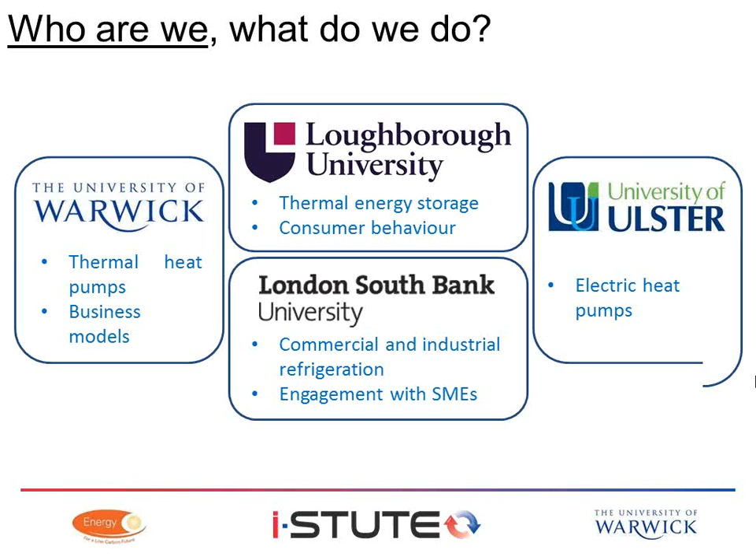In terms of people, just running through: there's me, there's David Elms sitting there from Warwick. David is from the Warwick Business School, because we have a strong business input. From Loughborough, there's Phil over there, and somewhere there's Vicky. Phil's main interest is in thermal storage, Vicky is in consumer behaviour.

Graham here and Judith at the back from London South Bank work on cooling technologies of all sorts. We mustn't neglect the cooling side - we're interested in heating and cooling. Neil Hewitt there, his main thing is electric heat pumps that work well and produce high temperatures. There's also a bit of storage work going on there in Ulster as well.

Okay, so that's who we are. There's a grand mission statement - we're going to save the world and stop climate change. Well, no, we're going to do our bit. We are trying to do our bit to reduce carbon emissions by improving heating and cooling technologies and their integration and real use.

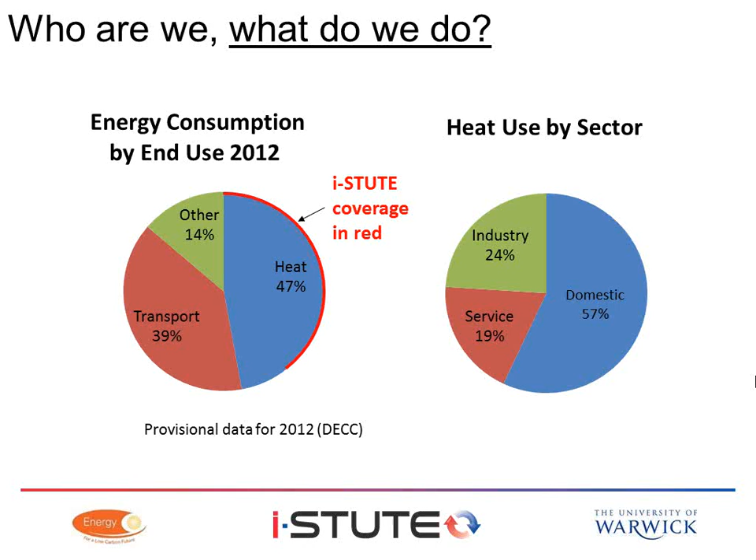I fished out a number that 16% of electricity use in the UK is devoted to cooling. That's a big chunk, but it's a bit difficult to put up on there.

Why the little I, apart from the fact that it looks cool to be an I-something these days? The I stands for interdisciplinary, and the reason that we're interdisciplinary is that us engineers like to get together and form nice little boxes that might be technically the bee's knees, but are too expensive and nobody wants. So the idea is that we involve people like David on the business models to see what will actually sell, and also from the consumer behaviour point of view, that we're trying to produce something that people will actually want. At the end of the day, if what we do does not produce something that people want and other people can make money out of selling, it isn't going to happen.

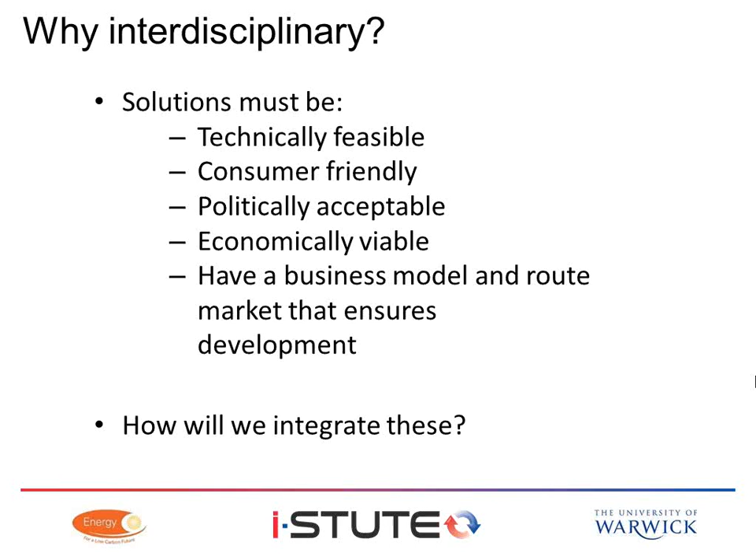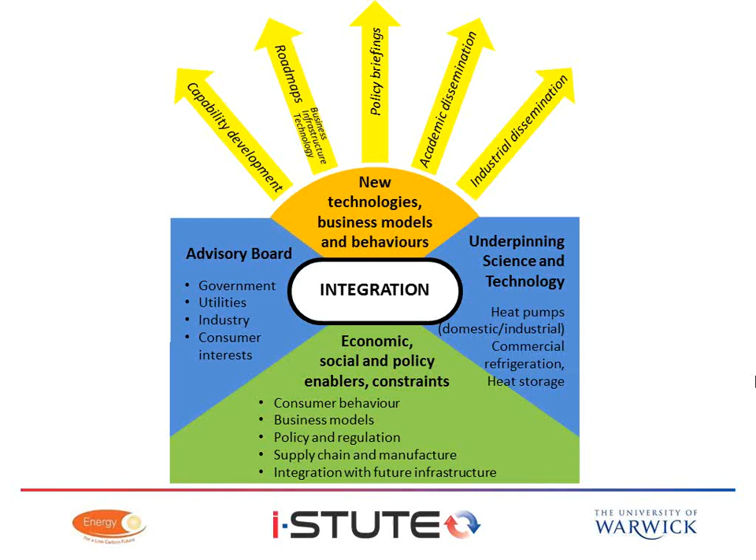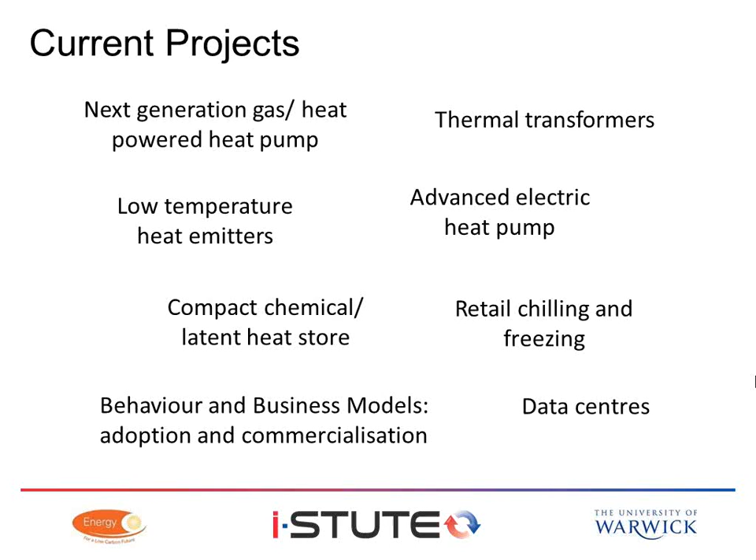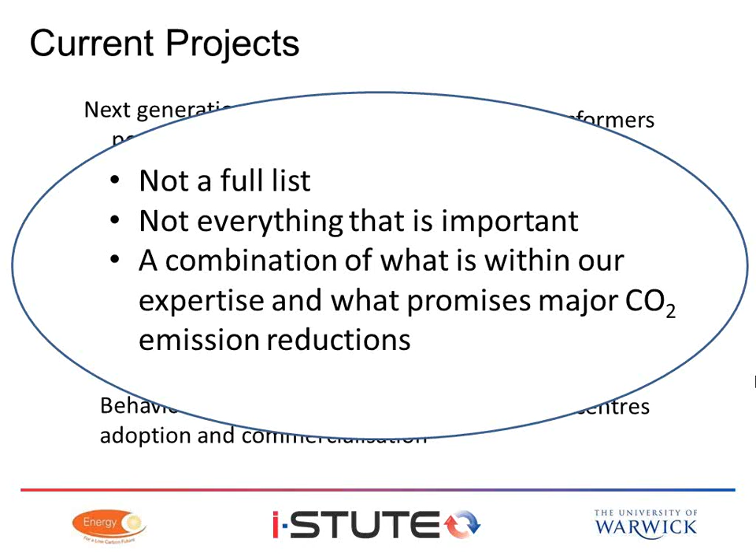So for the remainder of 5 to 10 minutes, I just want to run through the projects that we're working on, in no particular order. In fact, that's not even all of them - it's not a full list, it's not even everything that's important, but keeping a perspective, we've got funding for these 4 universities for 5 years. That's not going to change the world. So what we've done is pick on the things that have got high CO2 reduction potential and that we think we can do something about, we've got the expertise, and pick on those to have as big an impact as we can. That's what it's all about.

So now I'll run through, as I say, no particular order. One of the projects, the one that I'm interested in most, is gas-powered heat pumps. So, in a nutshell, throw away your condensing boiler, put a different box in, have a reduction of at least 30% in your fuel bills.

Reasons for that, apart from the CO2 reduction, we've already had Lindsay and others talking about the demands on the grid. So that's another reason for saying in a future heating scenario, there's still going to be some gas around, let's use it as efficiently as we can.

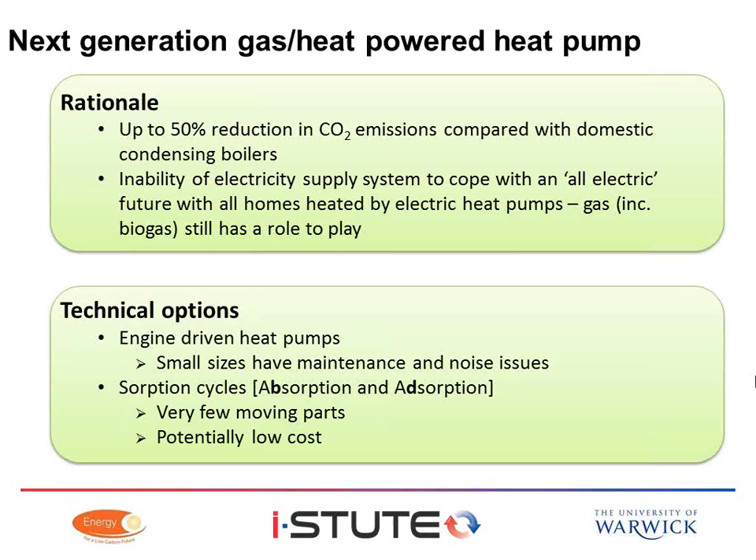And what we did in a previous project was to build a box that's still about that big and that high, and it didn't work quite as well as it should have done, but it did work. And that was the technical concept: big box outside the house, burns gas, gives you hot water.

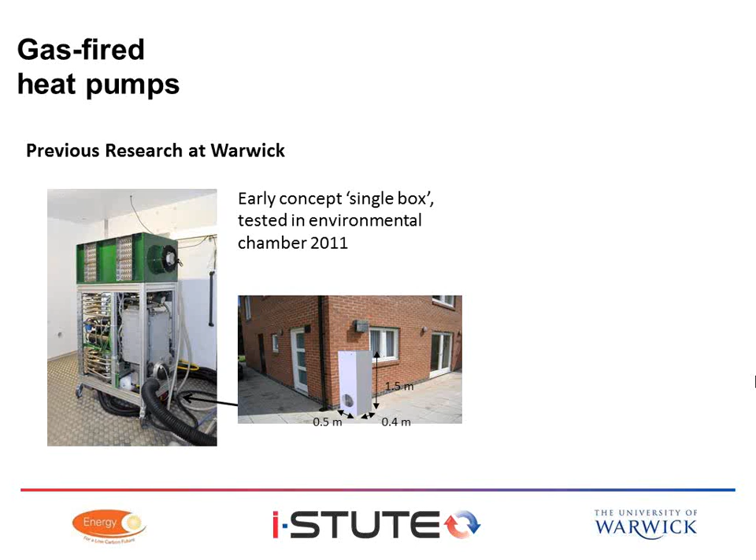As a result of listening to people like Andrew's predecessor at Baxi, also talking to Vicky, who did some consumer research, what we really need to be doing is effectively a split system where you've got a much smaller box outside because people don't want a damn great box in the backyard on the whole, and something inside that looks like a gas boiler, feels like a gas boiler, behaves like a gas boiler, but costs you less.

People don't want change, they want it to be just the same but cost them less. And yeah, ideally it should pay back for itself in about 3 years. So yeah, piece of cake. No, not really.

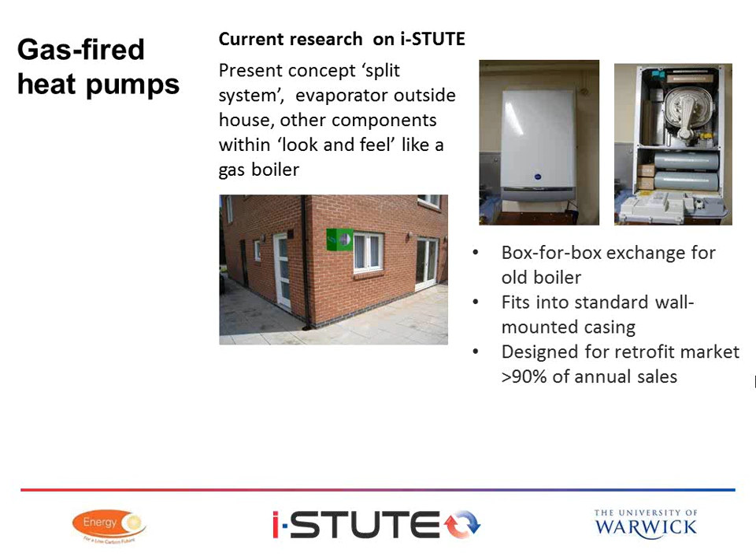Another project, this is going on at Loughborough. And again, this is related to what Lindsay and others talked about previously. We'd like to have lots of electric heat pumps out there, reduce CO2 emissions, but if we look at - I think this is one I stole from, yes, Steve Marland.

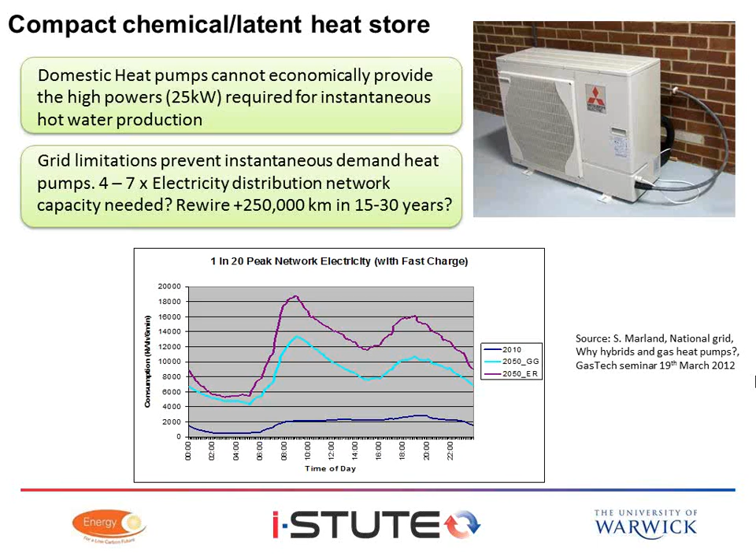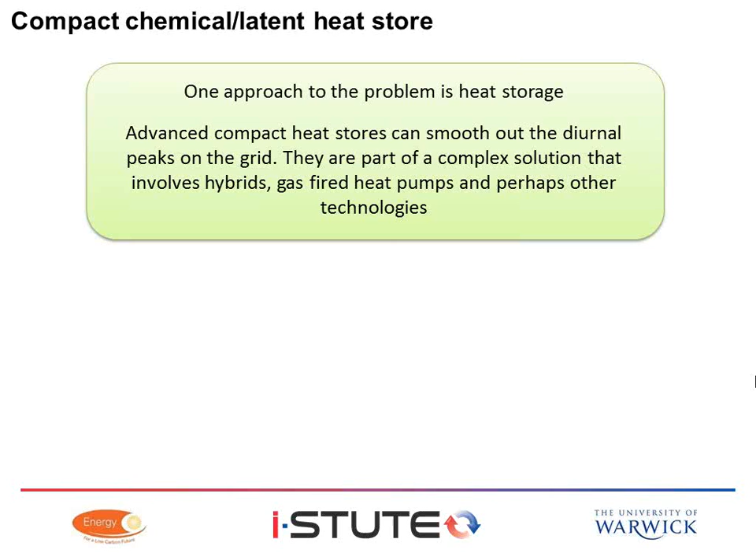It's a big issue. Part of the solution might be to actually store heat. So you can take some of the big peaks and troughs out of there by having a little heat pump running all the time, charging up a heat store, and then discharging it into your house to reduce just a bit of buffering in the load, really. So that's part of the solution.

And at Loughborough they've got both a short-term project and a short-term store - a few hours worth of heat storage to buffer your output between your heat pump and your house, based on phase change materials, comparatively straightforward technology.

And then there's another project for the longer term, and also possibly for more hours of storage, where you can use chemical reactions to store heat and have still a very compact store - 5 times the storage capacity of the equivalent hot water tank. Okay, so that's another area.

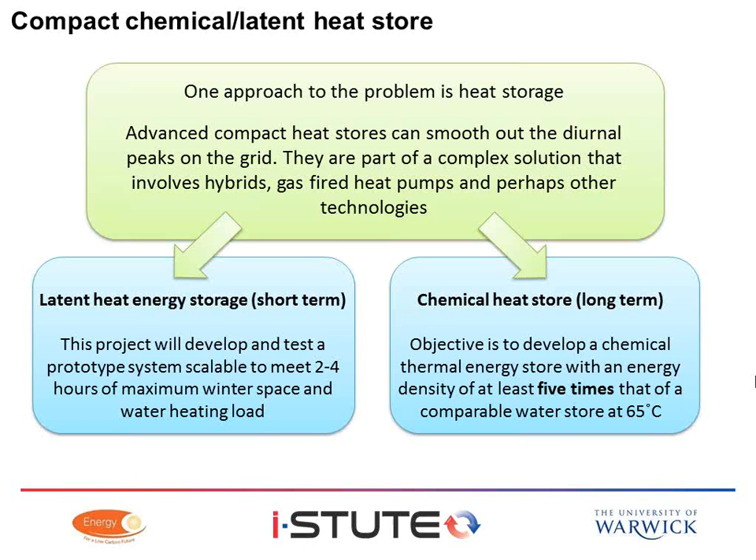Not forgetting electric heat pumps. It's a well-known and sad fact that in trials, most electric heat pumps do not perform as well as they do in the laboratory. There are issues to do with control systems, bad specification, bad installation, a whole range of things. What we have to do is to have real-life performance, have COPs - that's to say heat output over electricity input - of 3, whilst providing water that's hot enough for you. So there's a number of challenges there.

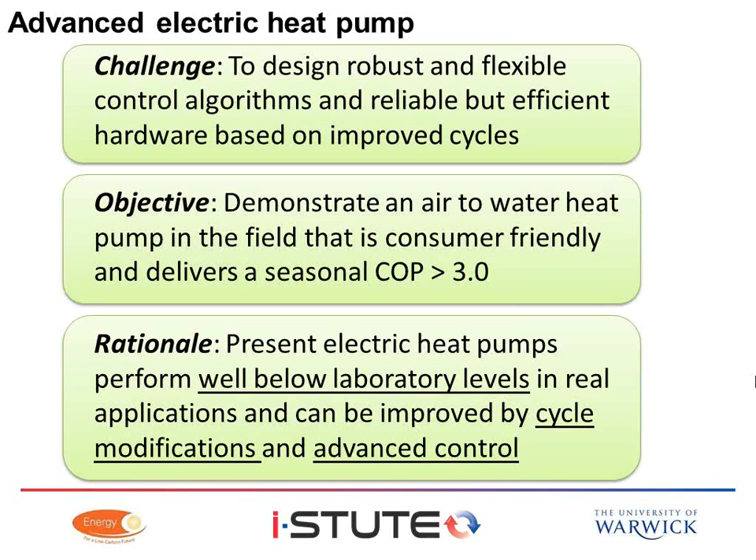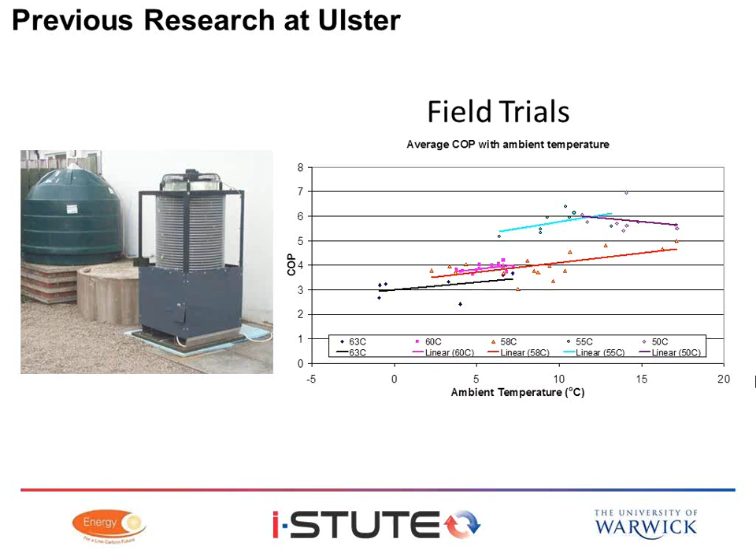In previous work, Neil over there in Ulster has produced these lovely Dalek-looking machines that in field trials do the required COP. But with all the constraints on the amount of space available, on the load on the grid, we need to get a bit cleverer than just having that bit of kit. We need to have a package that integrates stores, heat pumps, control systems in some seamless way that the consumer doesn't know about it. That's the key thing, that it should just be warm when you walk in and it shouldn't cost you too much to buy. So the work that's going on now is really on this integrated package, storage-led heat pump development.

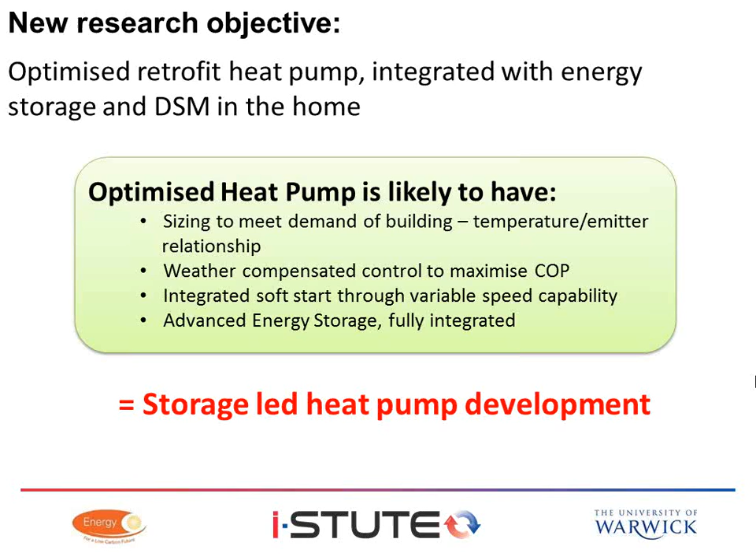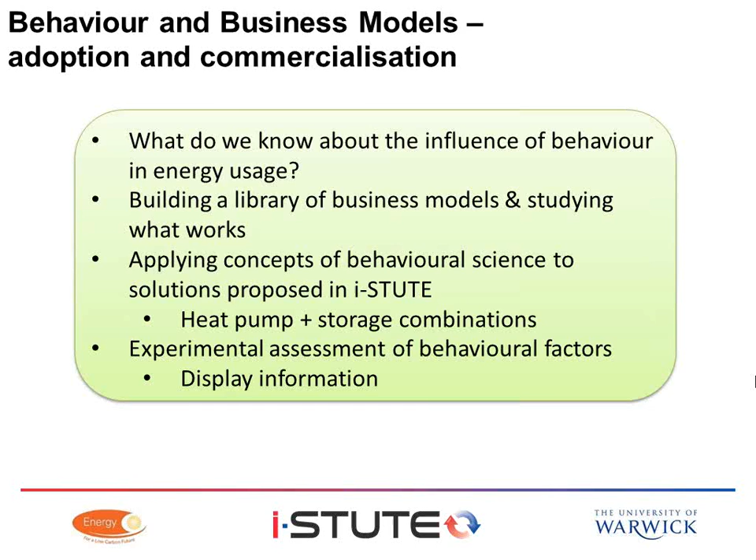Already mentioned quite a bit consumer behaviour, new business models - we've had some examples of that. So case studies, for example, for looking at new ways of supplying comfort to people, whether it's heating or cooling. Going to look at the heat pump and store combinations, look at all these smart systems for control and display information and so on. And as has been said before, there's various things appearing on the market there, so getting involved in that.

Also related to heating systems, this sounds a bit boring - low temperature heat emitters, radiators. All of these heat pump systems, whether they're gas or electric, work a lot better when they're producing water that isn't so hot. And so if we put on our techie hats, we say everybody should have a little fan boost into their radiators - it's a fan convector. And that would be the straightforward technical solution. You can buy some extremely expensive ones.

But there are consumer issues there. There can be noise, there can be drafts, they cost more, and you need a couple of wires going to every radiator. So we started to do some work with Vicky at Loughborough on looking at the consumer's reaction to these things, deciding what will actually work, and maybe we have to compromise.

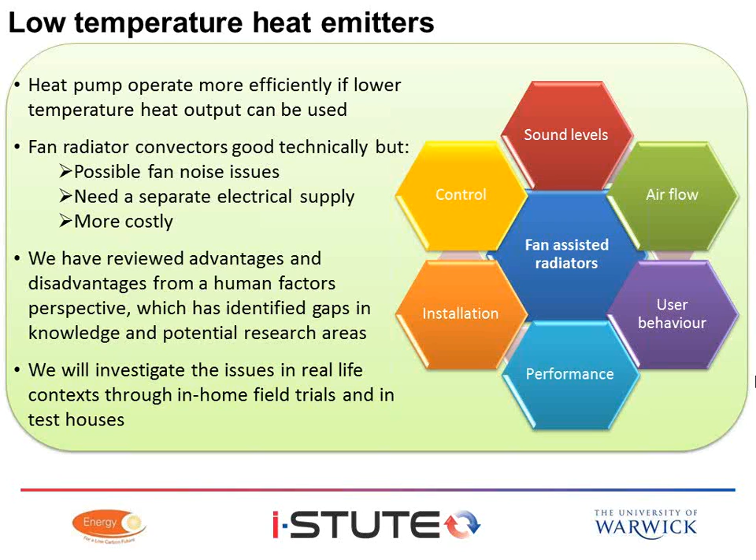You know, people don't want them. We've got to come up with something that maybe doesn't have quite as good performance, but at least people will use it. And on to cooling, which hasn't had much of a mention so far, but is an important chunk of what we do.

There is a considerable amount of energy used. You can see there's the equivalent of more than 7 million tonnes of CO2 per year in supermarkets. And a big chunk of that is all those display cases with your chilled food or your frozen food. You can do an awful lot with existing technology to reduce that. There's potential for saving there of nearly 5 million tonnes of CO2 per year. So, in one project...

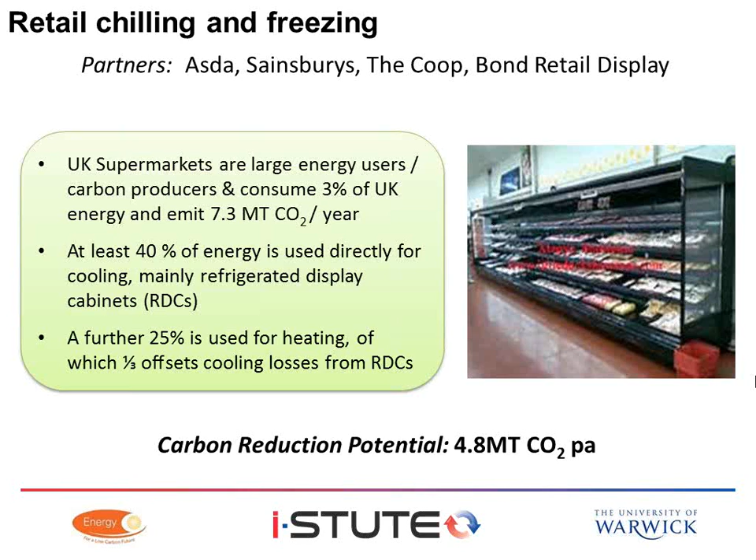Essentially, Graham's working to produce a new, improved cabinet that will have the same customer experience, we hope, but much reduced energy use. And there is a further project, a sort of next-generation new technologies, which will go even further. That's working with i-STUTE, with other manufacturers of cabinets and food outlets.

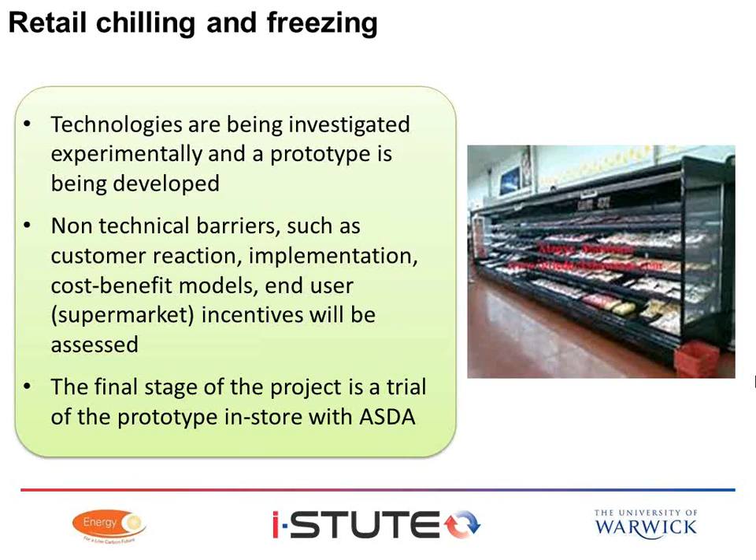Data centers are worth a mention, increasing numbers of them, and at the moment hopefully the data center is working and recording what I'm saying, and it's going onto the laptop over there, and you can all access this from the web later.

Increasing amounts of electricity are used all over the world in data centers, and the technology and approach to the cooling of them is a bit brute force and ignorance. It's not looked at in a holistic way. There's a lot of scope for reducing the energy from data centers, and again, we have a project on that.

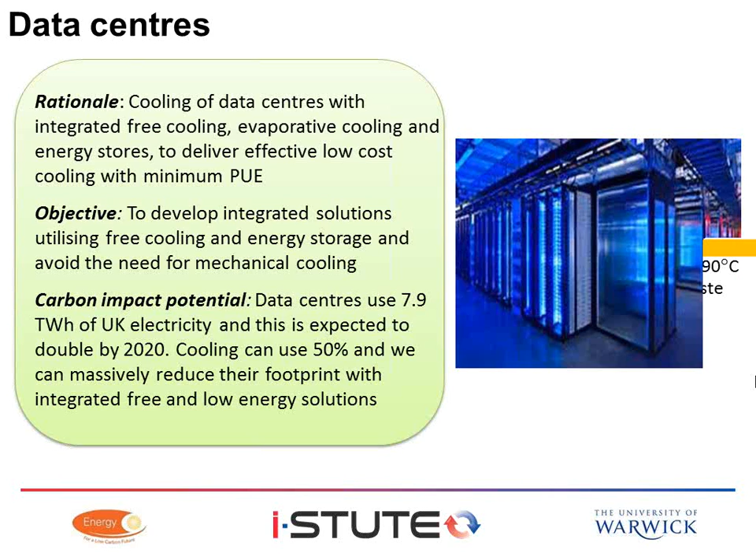Last project to mention, which is a bit of a blue-skies academic one. Well, I say blue skies, there's a definite need for it - it's an industrial application. Thermal transformers are magic thermodynamic boxes that take in a stream of waste heat and convert a little bit of it to something at a higher temperature level, and reject the rest to ambient.

Where they could really have a big impact within industry is the general process industry that uses steam heating. We're working with a very large manufacturer of heating systems in this area, and they see a big market for being able to take waste streams of condensate, hot water at 90 degrees C, that quite often cannot be used in industry, that come out of the steam system, and upgrade maybe 30% of that back up to 120 degrees to use for fresh steam.

We also have the possibility, without going into the details, of incorporating storage in there. So when you've got waste heat, particularly in the food industry where you get batch processes, you might have waste heat at one time and demand later, and you can meet both of these together.

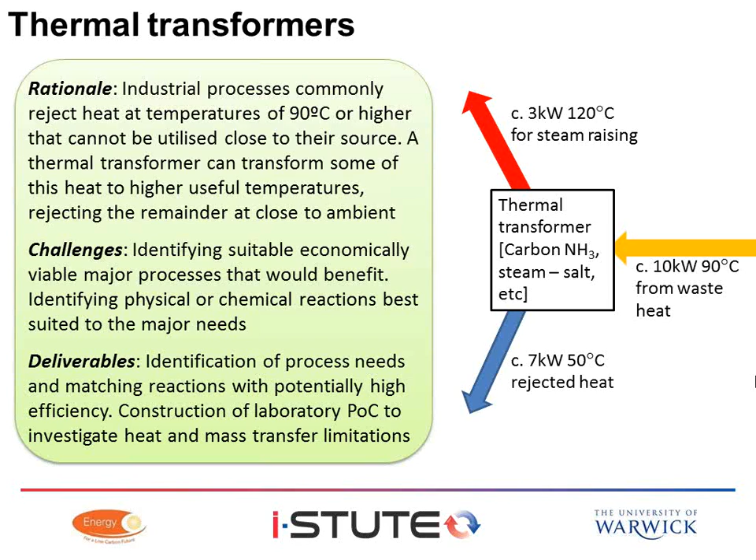Okay, so that's my sort of run-through of the sorts of things we're practically trying to do. Let me just try and summarize all that. Okay, so we're a bunch of business, consumer behavior, technical scientists, etc. people trying to come up with new solutions that are practical for heating and cooling.

We would like some input to find out whether we're doing the right thing or not. Tell us what we should be doing - we can't drop everything and do your pet project, but we would like your input. We'd like involvement, to make sure that we're doing something sensible, that it's going to be wanted.

We would like collaboration. So we've got all these projects that I've mentioned over the range of controls, fancy heating, cooling, storage, etc. And as everyone has said before, there's no one technology that's going to dominate. We need all of this stuff to work if we're going to get to the low carbon future. So yeah, we're going to need all of those things there.

And presumably there are more ideas around that no one's thought of yet. There's going to be new things occurring. But whatever comes up, it's got to be possible to have it in an integrated system. It's got to appeal to the customer. Manufacturers have got to be able to make money out of it.

And from the point of view of our research centre, we've got to come up with useful things. We've got a 4-year life from about here, so 4 years to produce the goods. There probably is a bit of pressure, but we'll do the best we can. That's it, thank you very much, and I'll hand back to...